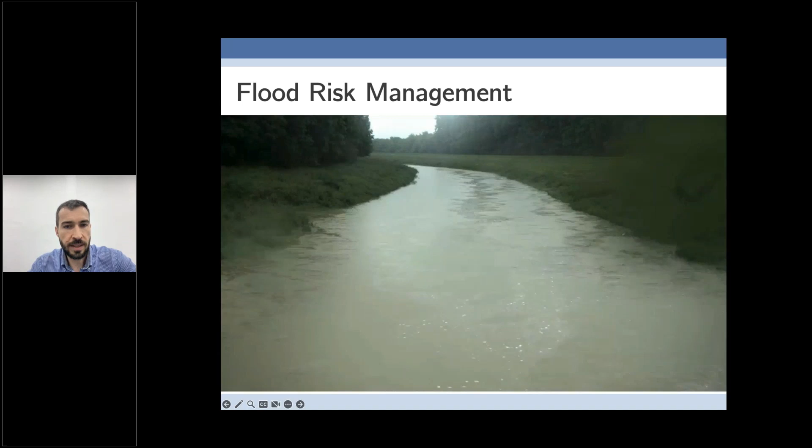In terms of flood risk management, we can talk about three things. The first one is detection. Detection is something we actually do when the flood has already started. Without any earlier preparation, detection is an immediate action that can be done during the flood to mitigate or minimize the damage caused by floods.

Then if we look a little bit more into the future, this is prediction or forecasting. We can forecast the weather, the rainfall, and use river or flow models to forecast the water level, and warn people in advance that a flood is coming. We can warn emergency services to prepare for potential flooding.

We can tell people to avoid unnecessary travel during the season when we expect heavy flooding, and tell them which areas will be flooded. We can evacuate people in areas where we expect really heavy flooding. So prediction is something we do to mitigate flood risk maybe a week in advance, or a few days in advance.

Finally, the third thing is planning. Planning is something we can do many years in advance to mitigate or minimize flood risk. I'll talk more about it later. Planning involves things like construction works and public education, but to do the planning properly, you need a lot of data to do it efficiently.

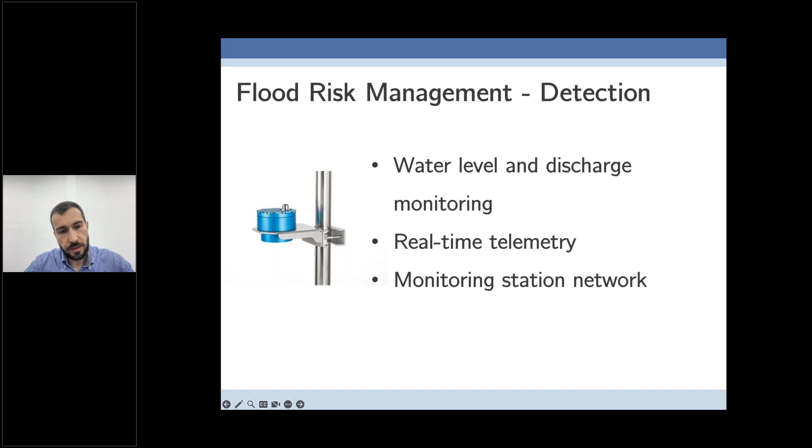So in Croatia it is crucial to have many water level and discharge monitoring sites on all these smaller tributaries, because depending on weather conditions, rainfall, or snow melt, sometimes the flood can start from one region of the country, sometimes from another region.

Sometimes you can have very heavy rainfall in a small area that creates a flood, but sometimes you can have steady rainfall, not of high intensity, but affecting the whole country. Then all these small tributaries have slightly increased water levels, but when they discharge into the biggest river, you can suddenly have flooding downstream.

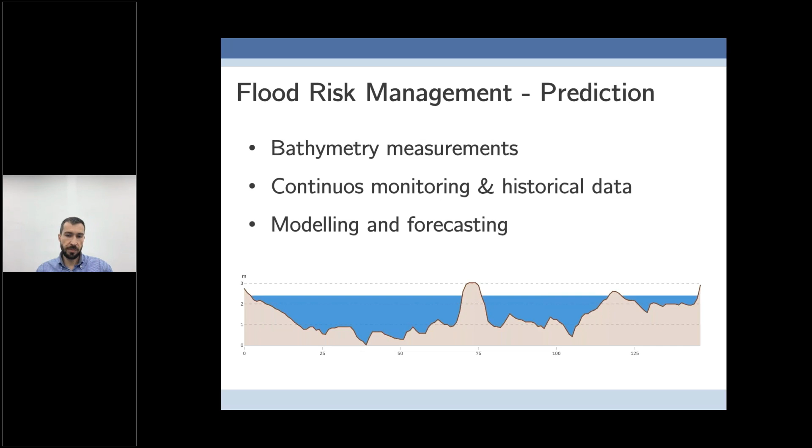The forecasting information sits between the prediction step and the planning step: having protocols for informing the public that a flood is coming. You need to plan these protocols in advance, how to share the data with all relevant parties, so that when you do the forecast, you already have these protocols in place.

From a planning perspective, the most costly measure is of course construction, but construction itself makes the biggest saving from flood damage. Education is not very expensive, and it also has a big effect, especially in changing how people behave and in saving lives during a flooding event, while construction work is targeted at saving both life and property. Education is more targeted at saving life.

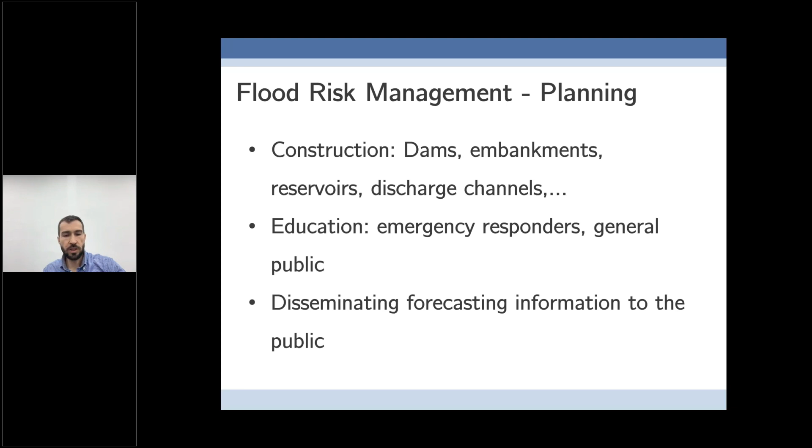Finally, people should be informed about an incoming flood in a timely manner. I have mentioned that for all three parts—detection, prediction, and planning—it is important to have accurate and real-time data about water level and discharge in rivers and channels.

For detection, you need data in real time to be able to warn the public. For prediction, you need data collected over many years so that your forecasting models are accurate. And for planning, you also need long-term hydrological data for water levels and floods, so you know where to build dams, how big a smart tunnel needs to be, and so on.

Coming from a company that manufactures this kind of instrument, I can share some of the technologies used over the past few years to deliver accurate and precise data. To get accurate measurement of water level and discharge, you need to be aware that this kind of instrumentation is installed out in the field.

These instruments, first of all, need to be reliable. They need to be able to operate under all kinds of atmospheric conditions—high or low temperatures, depending on the climate zone where they are installed, and when the weather is hot, humid, or dry—because you do not want this data only during rainfall, but also during the dry season, so that you can do prediction and forecasting accurately.

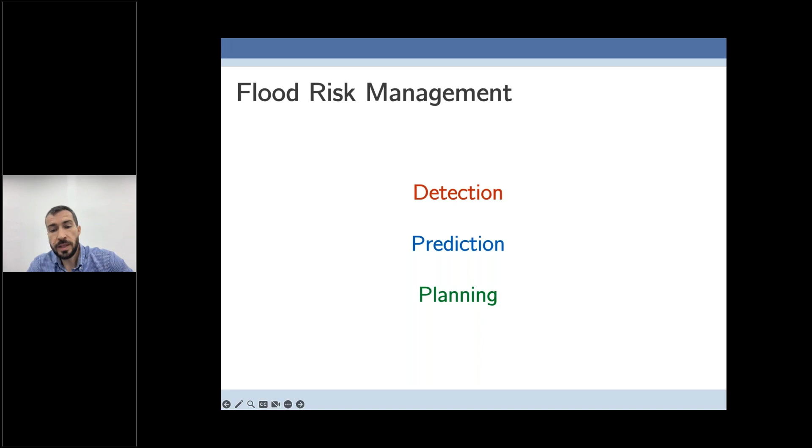We have seen over many countries where we work on this kind of projects. In some countries, they just measure the water level at many monitoring sites. To get the discharge of water, the flow in cubic meters per second, they do many calibrations where they use an instrument such as an ADCP or a hydrometric wing, like a propeller, to measure the velocities across the whole channel and then calculate the discharge of the river.

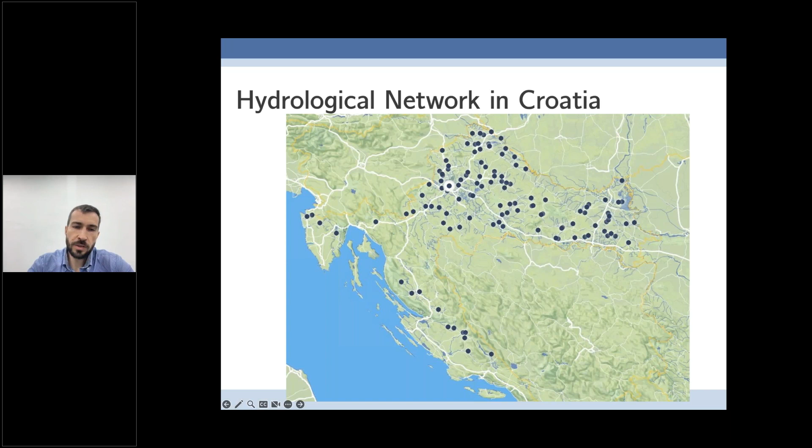Not many, but more and more countries over the last few years have also started to perform continuous discharge monitoring, so not only measuring the water level, but also water discharge. There are many different kinds of instruments that can be deployed in the field to perform discharge monitoring.

There are contact instruments such as a side-looking Doppler instrument. This is an ultrasonic instrument which is submerged into the water and uses the ultrasound principle to measure the velocity of the water flow.

There are also non-contact instruments such as radar-based sensors, which measure the velocity of the river flow from above the water surface. I would like to discuss this method a little more because it provides many benefits, such as ease of installation and low maintenance, which I have just mentioned before.

As an illustration, I will use the instrument manufactured by our company. You can see the picture of this instrument, and it actually consists of two different sensors, two different radar sensors.

The one you can see on the bottom part of the instrument, the blue circular one, is a radar-based water level sensor. It measures how long it takes for the radar waves to travel from the instrument to the water surface and then bounce back. The longer it takes, the further away the water is from the instrument, and using a simple calculation, the instrument can determine the water level.

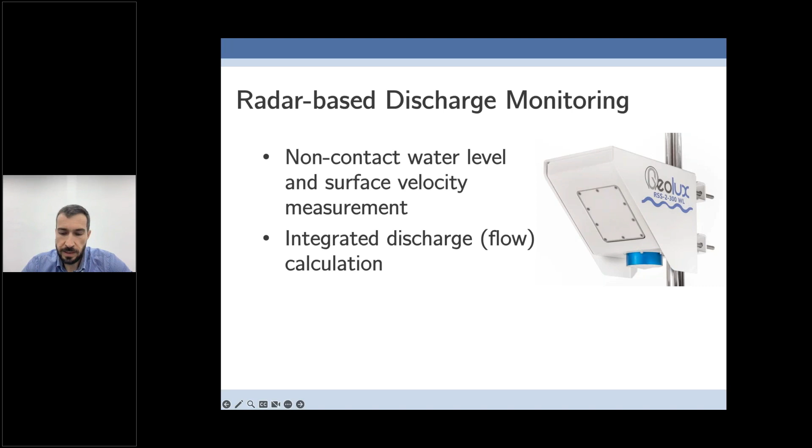Now, the question is, how is this instrument able to determine the complete discharge of the river if it measures just the water level and the surface velocity? This is something I am going to discuss now. But before we go into the discharge calculation method, I would like to outline once again the benefits of using non-contact technology.

So it can be done even during light rain or even heavy rain, although that may be unnecessarily dangerous in those cases. But you do not need to wait for low water conditions.

You do not need any special tools or cranes or things like that. If it is installed on an existing bridge, then the installation is really, really quick.

The maintenance for this is very low. When our customers ask what kind of regular maintenance is required, we recommend that you visit the site once per year and do a visual inspection of the equipment on site. There is no regular maintenance required for the instrumentation.

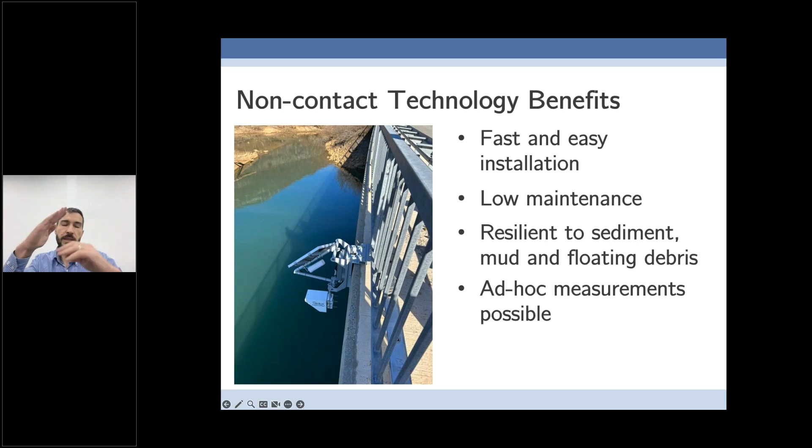For the radar instruments to work, the area between the sensor and the water surface must be clean of any other object, so that the radar beam, transmitted by the radar, can freely propagate to the water surface and be reflected back.

Sometimes if the channel is very narrow where the measurement is being made, it can happen that some vegetation grows or a tree branch grows in front of the radar, so in that case it has to be cut down to provide clear operation.

But since this vegetation grows slowly, it is not required that the visual inspection is done very often.

On some sites, maybe one out of a few thousand that we have installed, we would see, for example, hornets building their nest all around the instrument, blocking the operation of the radar. Or somewhere the cables were damaged by small animals like a mouse or squirrel, which would simply bite the cable so it could be damaged.

Of course, this is something that can happen to any other equipment installed in the field. But it is very important to note that hydrological equipment outside of the water requires much less maintenance than equipment installed inside the water, because there is no sediment flowing around your instrument, no mud.

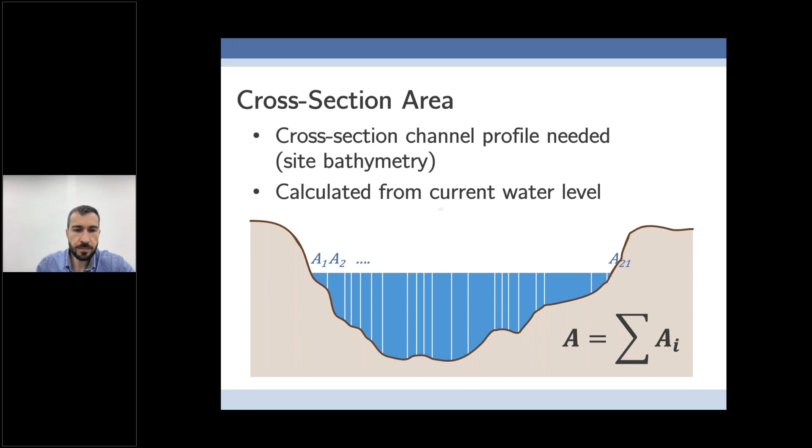The next step is how can we determine the average flow velocity across the profile if the radar measures only the flow velocity at the surface.

These velocities get slower and slower as you move closer towards the ground. And at the ground, because of the slowdown due to friction, the velocity drops suddenly to zero.

To get the average flow velocity across the channel based on surface velocity measurements, we introduce something called the K factor. This K factor is a simple ratio between the velocity measured at the surface by a radar instrument and the average velocity across the whole channel.

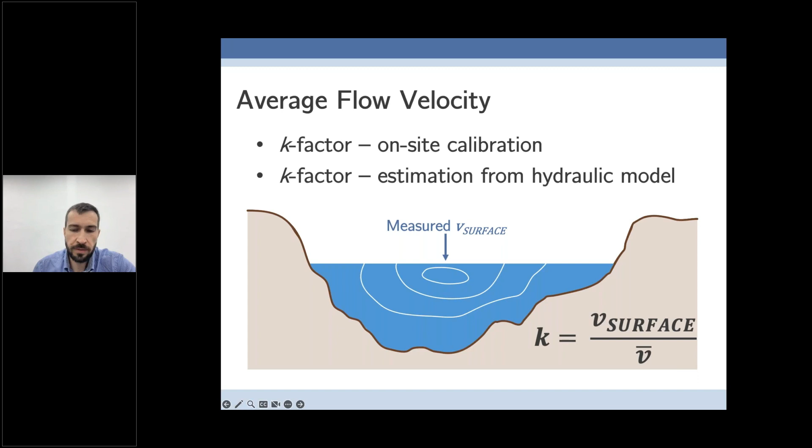As I've explained, the K factor will not change greatly for small changes in water level, but only when the water becomes very shallow or during flooding.

Now the question is, how can you calibrate the K factor? What does this calibration involve? For small rivers, typically flow meters such as hydrometric wings, a small propeller, or an electromagnetic sensor are used.

A person would walk across the channel, measuring flow velocity maybe every 1 meter or every few meters apart, and also at several different depths. By making these multiple flow velocity measurements across the channel profile, you can easily determine the average flow velocity.

Then you take the average flow velocity determined by manual measurements across the whole channel, and the radar measurement of the surface velocity, divide these two values, and you get the K factor, just like in this formula.

On bigger and wider rivers, it is impractical to do the calibration with flow meters. On very wide rivers, it would take a long time to cross the river, and the flow is sometimes so fast that it is not easy to put the flow instrument deep inside the river. In those cases, an ADCP instrument can be used.

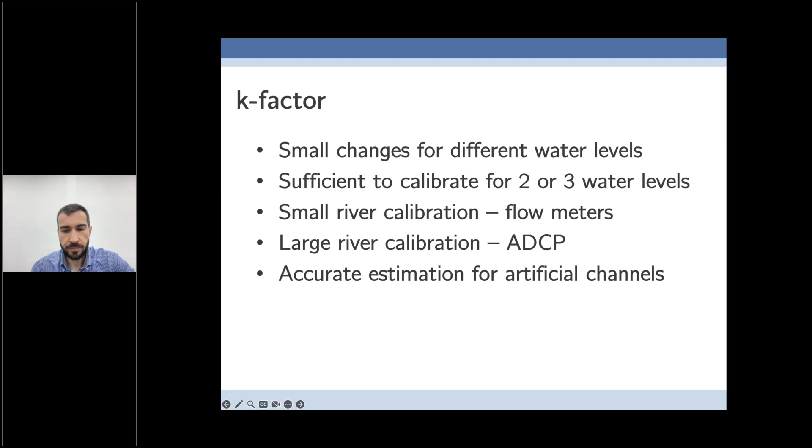The benefits of using surface velocity methods - there are several of these benefits. The first one is continuous discharge measurement. If you want to measure discharge at a certain point of a river, you can always go there with an ADCP, for example the ADCP boat. You can pull it across the river and you can get a measurement of the discharge.

However, that is not continuous measurement. You had to go to the site, perform the measurement from an ADCP, sometimes do some small post-processing or cleaning up of the data, and then you get the discharge measurement at one point in time. And it is expensive to do it again, so you do it just for the calibration typically.

The radar-based method for discharge measurement is continuous discharge measurement. It will provide continuous, real-time information about the discharge at a certain site. You can have this sent by telemetry data to your system. You can have many hundreds or thousands of monitoring sites across the country, and all this data will continuously be fed into your system to allow you to do real-time prognosis, warnings, or alerts, and so on.

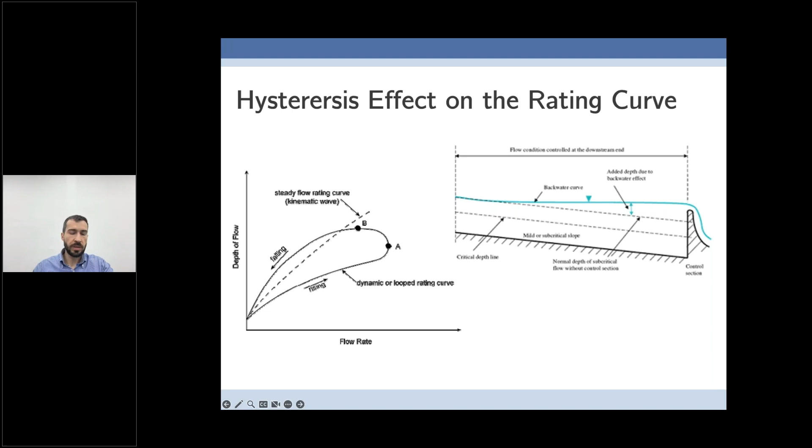The other benefit of using the surface velocity method can be seen on rivers that have reversing flow. Typically, there are two kinds of rivers where the flow direction can be reversed. The first are tidal rivers, those with confluence into the sea affected by tide effects. Every time there is a rising tide, the flow direction of the water can be reversed and some part of the water can flow inland. With the surface velocity radar, it is possible to determine the direction of flow.

If there is a farming area close to the sea negatively influenced by too much salt water, you can easily use the surface velocity radar to know when the fresh water is flowing out to the sea, but also when the seawater is coming inland. So to protect the crops and farmland, you can close the floodgates. Simply measuring the water level, you will never know if it's rising because river flow increased or because high tide is coming, unless you have many mareographic instruments to measure tide and compare against water level. So it is much simpler to have surface velocity measurement in place.

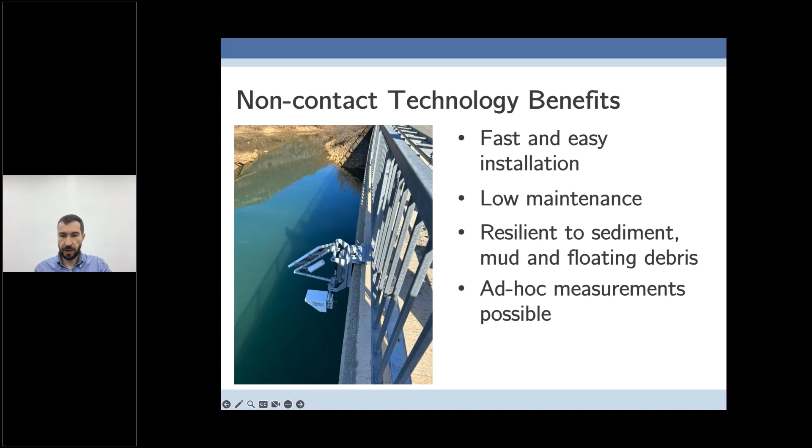And finally, by measuring the surface velocity and the water level, discharge can be calculated in a very accurate way. Of course, to get the accurate measurement needed to plan for flood protection, mitigate flood risk, and give accurate forecasting, it is critically important to have accurate information about the flow, discharge, and water level.

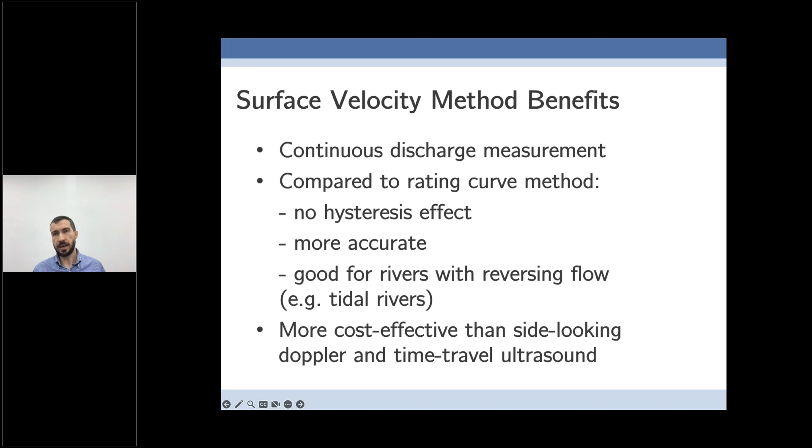I can also show you what we do on our side as a manufacturer of these instruments to provide the highest accuracy. So I will show a small video of how we calibrate and test our instruments when developed. I hope that this video will go through the presentation.

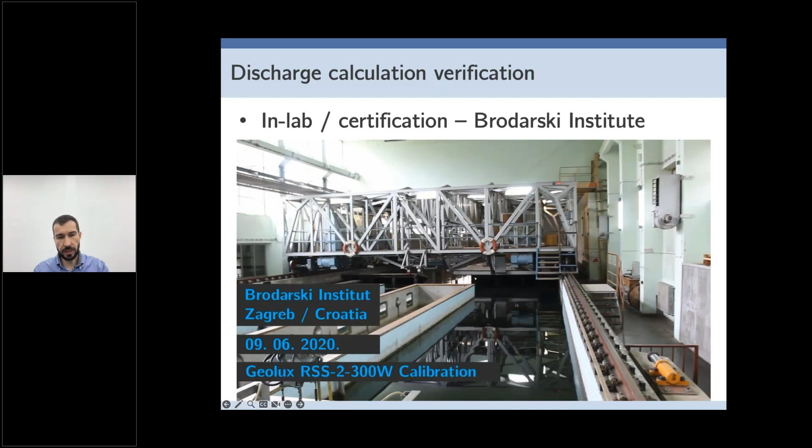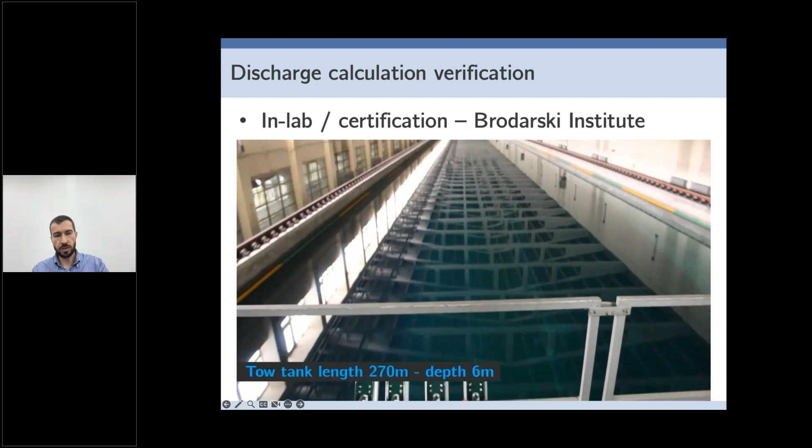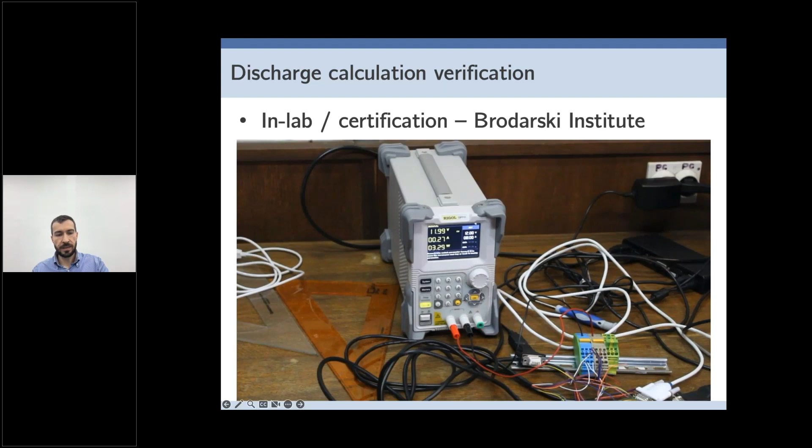So this is a huge tow tank, like a very long swimming pool, 270 meters long. It has a big platform on it that can be moved in a controlled way with controlled velocity above the water. We place our sensors, the surface velocity radars, above the water on this platform. The platform is moved in a controlled way with exact velocity, and then the measurements from the sensor can be calibrated.

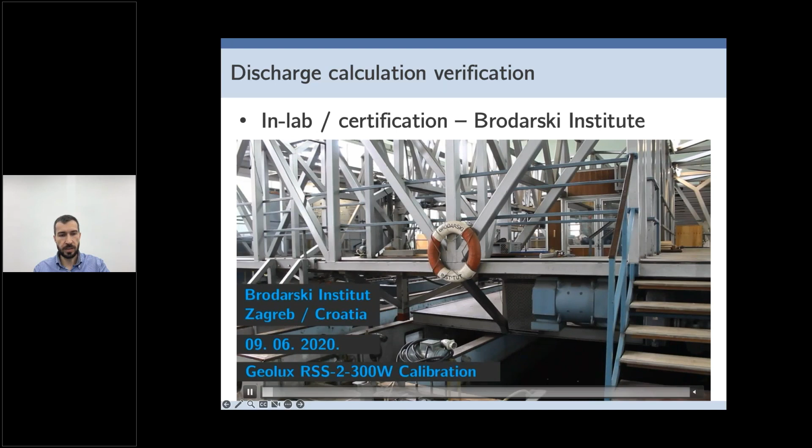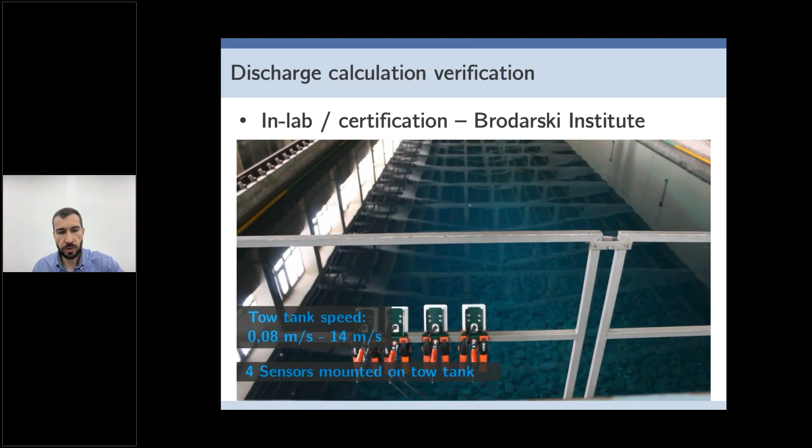Using this method, we ensure that the instruments to measure surface velocity produced by Geolux can operate within this tested range from 2 meters per second to 12 meters per second with accuracy of less than 1%. In a smaller tow tank based in Switzerland, which I don't have video for, we calibrated the sensors from 0 to 2 meters per second. So for the full operational range, the instruments have been tested in a controlled way in tow tanks: smaller velocities in Switzerland, and larger velocities in a big tow tank in Croatia. I'll let the video play to the end, and then we'll move to the next slide.

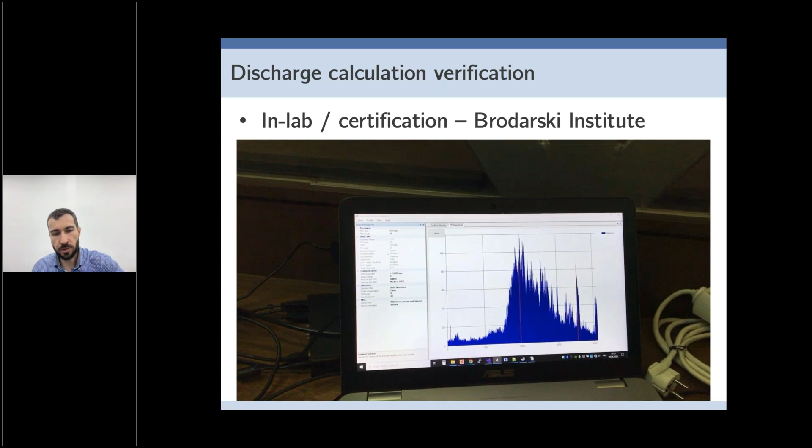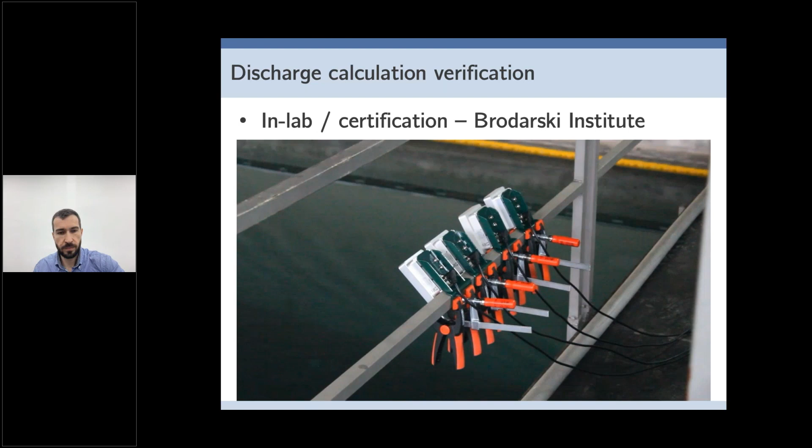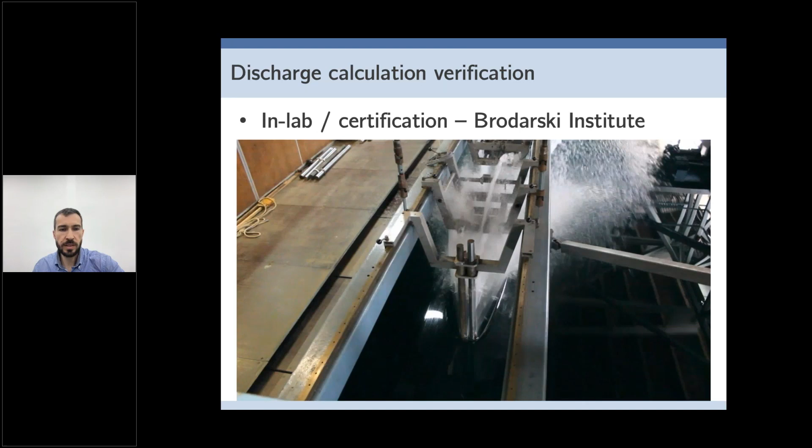So to make the conditions as realistic as possible, we also have this steel rod inserted into the water to create some disturbance on the water surface, to create the waves, as this is what can be expected with the river flow.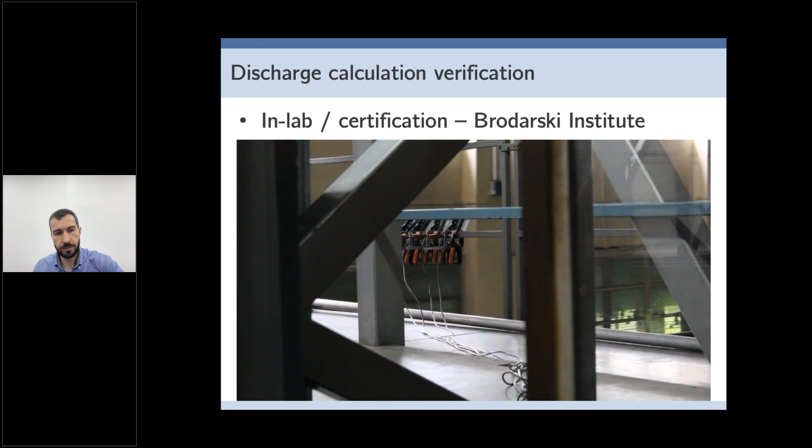And this is the equipment on the platform which makes it move and control the wave.

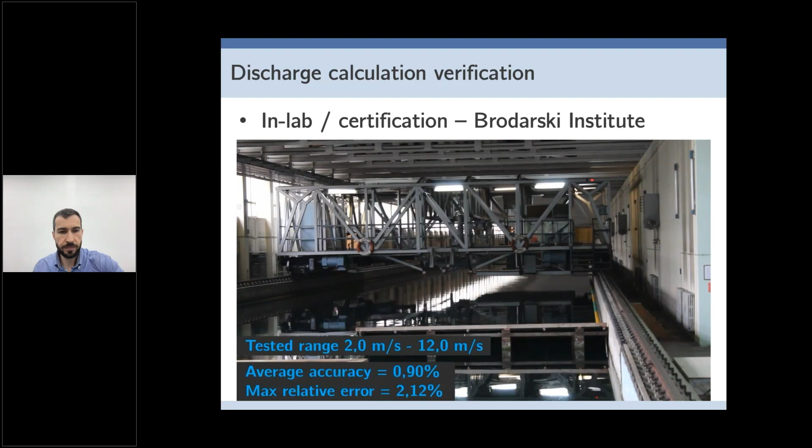So the title of this presentation is Flood Risk Management and Early Warning Systems. So far, I was talking mostly about flood risk management, what can be done to manage the flood risk, and how to collect the data which is essential for it. I have also highlighted one of the modern methods used to get the discharge data required for flood risk management.

The second part of the presentation is how to implement early warning systems. Early warning systems have basically two goals that need to be satisfied: the first is real-time flood detection, and the second is reliable alarming. So with the early warning system, you need to be able to know when the flood is happening, and you need to be able to raise an alarm and send this alarm to people.

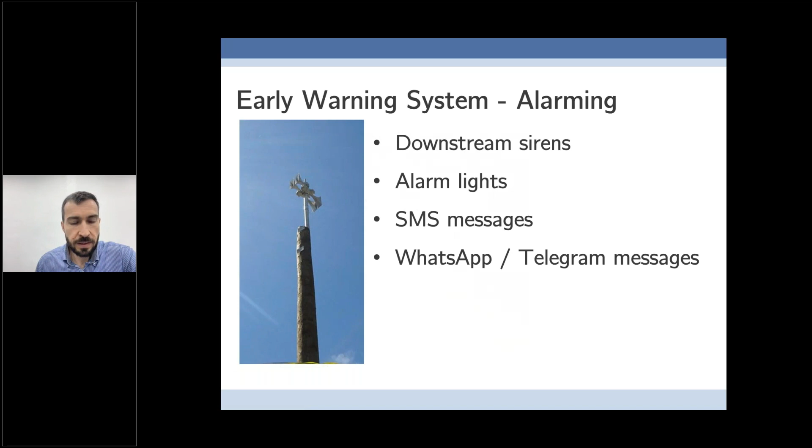As I said in this previous slide, real-time flood detection but also reliable alarming is critical. There are several considerations about data transfer that need to be satisfied in order to provide reliable alarming, and we have seen this in several of the projects where we participated.

You need to be aware that the GPRS network, while it is very versatile and typically widely available, can be unreliable. The first reason is simple: perhaps some area is not covered by the GPRS signal, and one village downstream might have houses not really covered. If you rely only on GPRS to send an alarm, it's possible it will not reach everybody.

But a bigger problem with GPRS is that it's a public network. It is not isolated, and it is used by all people within an area. During a flood event, as we've seen in many countries including our own in Croatia, when flooding happens people start calling emergency services, police, the fire department, or whoever is in charge of evacuation. People start calling family members to ask if they are well, if they need help, or to ask for help themselves.

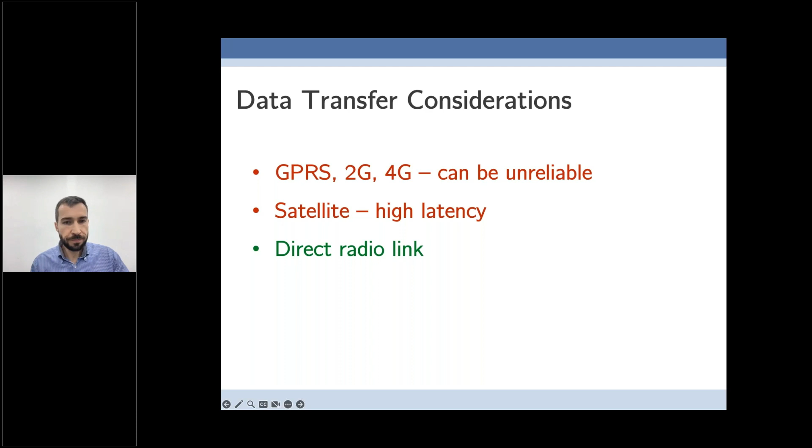But also to provide wider distribution of warnings, we use the GPRS link, which in most cases is available. However, the alarms sent to mobile phones can sometimes come a little late or be delayed. But the important part is that all areas that can be flooded have local sirens or local alarm lights which use reliable direct radio link communication to the water level monitoring station.

Finally, it is also important that the equipment health of all these sites is continuously monitored. If they're operated by a solar panel, then the battery status and solar panel health should be transmitted periodically to the central data storage system, so that if there is any problem with equipment, it can be detected early by maintenance personnel, giving them enough time to go on site and resolve the problem, maybe replace the battery or clean the solar panel if it's dirty.

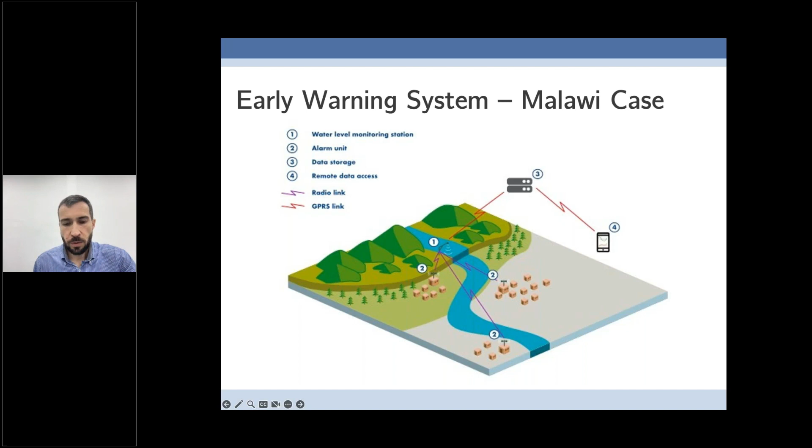Now moving forward to the end of my presentation before the Q&A part, I would just like to share several pictures of various kinds of installations of the monitoring equipment, which are used either for early warning systems or for planning of various flood risk mitigation projects.

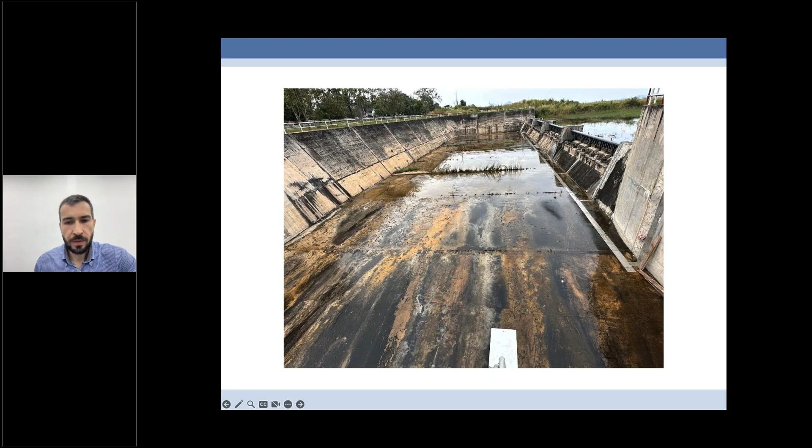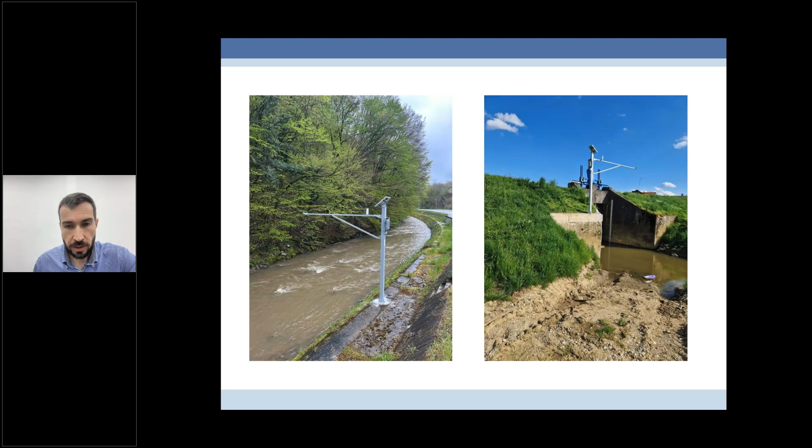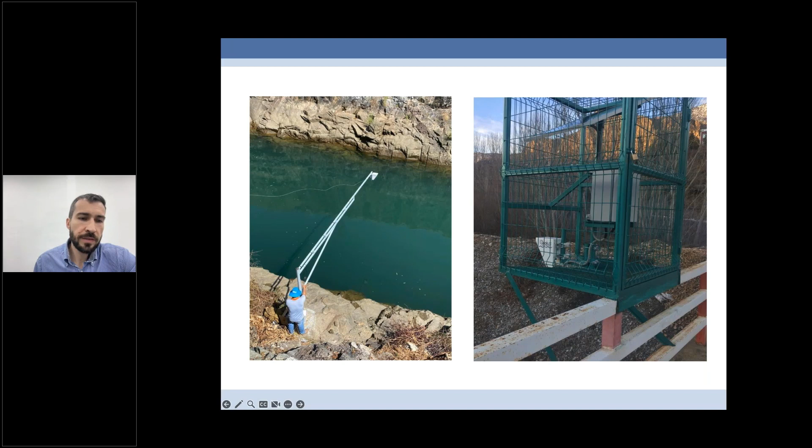On the left image, the arm, the cantilever, is approximately 5 meters long. It can also be longer, like in this picture, where it is approximately 10 to 11 meters long, if it is required that the cantilever extends more towards the water surface. To prevent vibration of the instruments, there are many tension wires, support wires that keep the cantilever arm safe from any vibrations.

When installing radar-based instruments above the water surface, it is important to prevent any kind of vibrations. The vibrations themselves will not disrupt the water level measurement so much, because the water level sensor makes multiple measurements and calculates the average value, so it averages out all these vibrations. However, the surface velocity sensor is affected by vibrations. So for this reason, when a longer cantilever arm is used, it is important to make it stay in place.

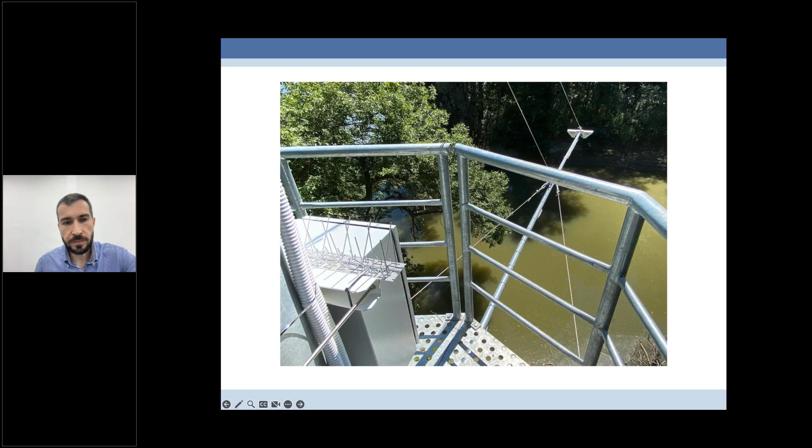On this picture, you can also see some other installation on top of the bridge, where it's very easy to install because the bridge structure is in place. And again, the site is small, it's compact, easy to install, and continuous measurements are provided.

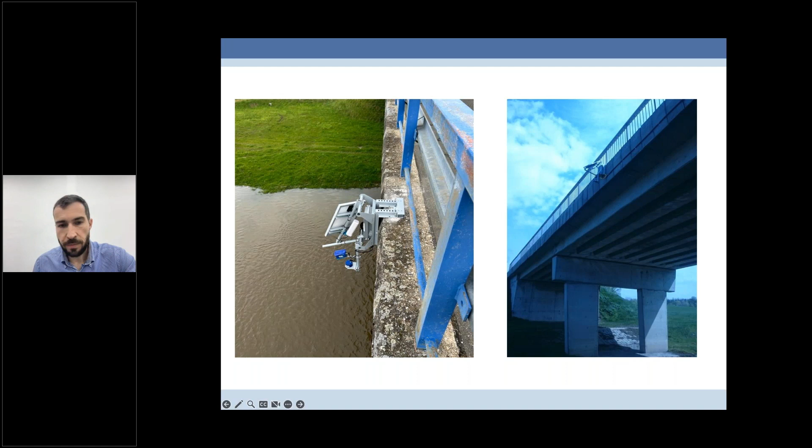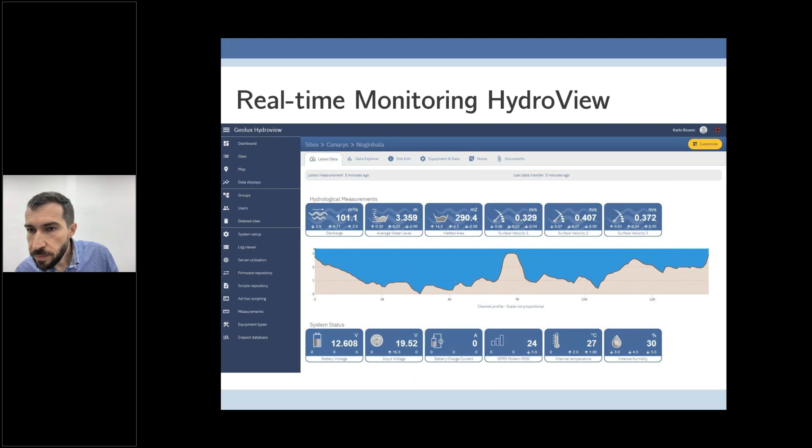Just a moment. I will now share a different screen, sorry. Just wait a brief moment. Just a few more seconds.

So here you can see what the initial login screen looks like. There is a list of many sites that receive the data, water level and discharge, and some sites even receive water temperature data. Since this is an ongoing project, so far approximately 130 sites have been installed.

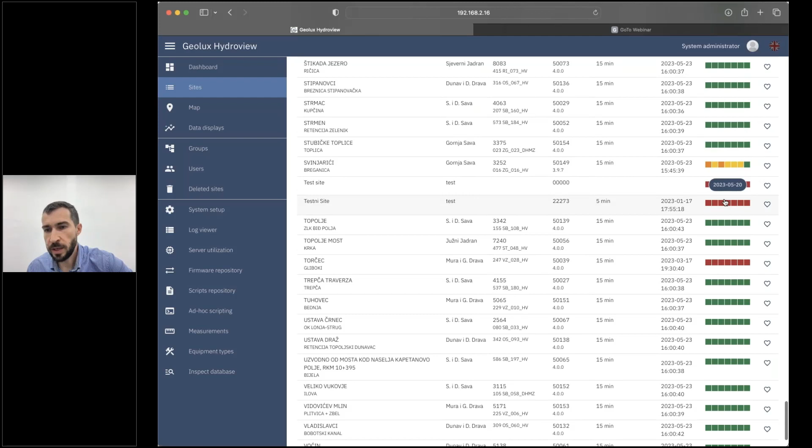Some sites are currently undergoing installation, so for them you would see red indicators that the data is not being sent to the system. On the right side with these indicators, you can see the health status of the data being transmitted. If this is green, it means all the data for a certain day was sent. There are seven squares, each indicating health for one day in the past week. The ones which are red do not transmit anything. The ones which are yellow transmit some data, but not all, due to very weak GPRS signal on site.

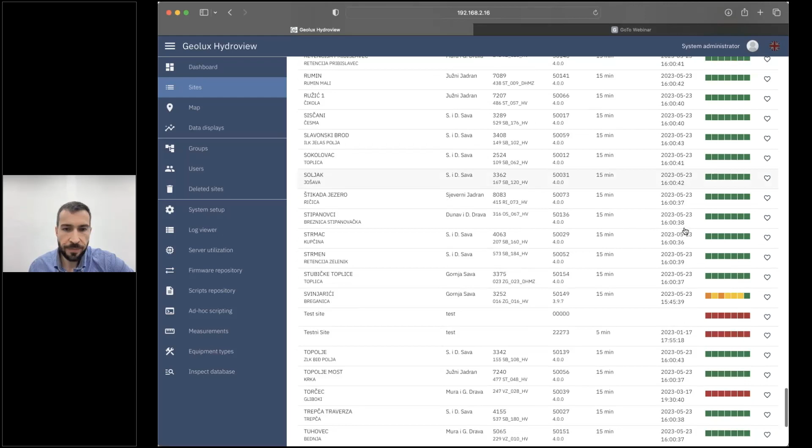Now we can click on a certain site to actually see measurements. This site, which I have just randomly selected, has a camera on site as well, which gives us snapshots maybe every hour or every 2 hours. So we can slightly scroll back and see what the flow conditions were at a certain point in time.

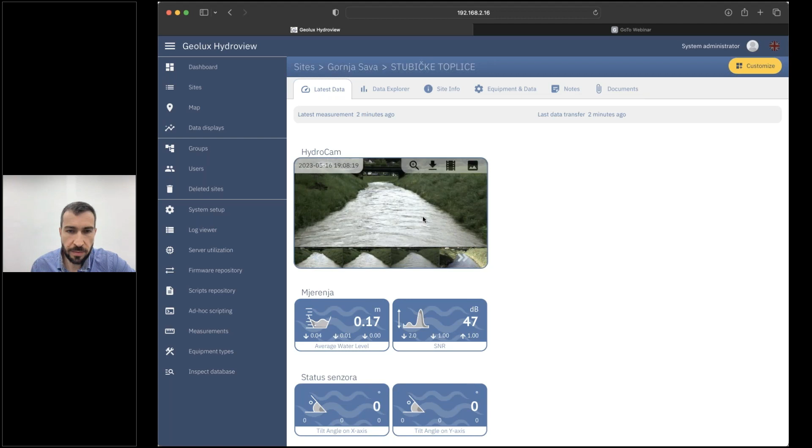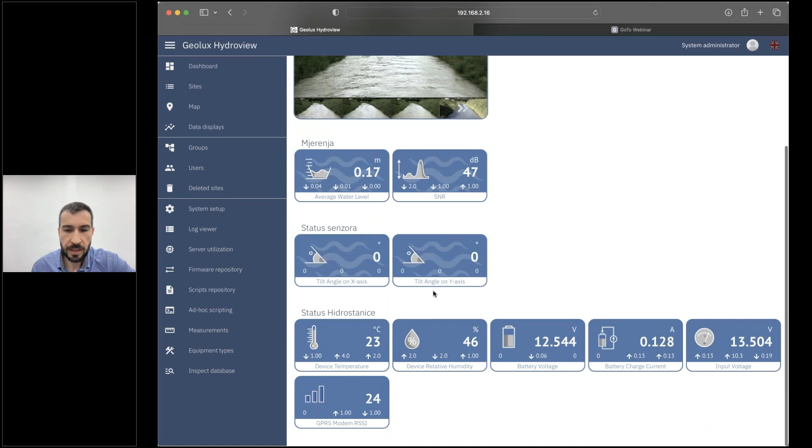I will also zoom in on the picture just to see what this river looks like. It is a small river, but this one can also flood a lot. You can see here the current measurements of the water level and diagnostic information like the tilt angle of the sensors, to make sure they have not been bent and are looking perpendicular to the water surface, and some battery status and the strength of the signal and so on.

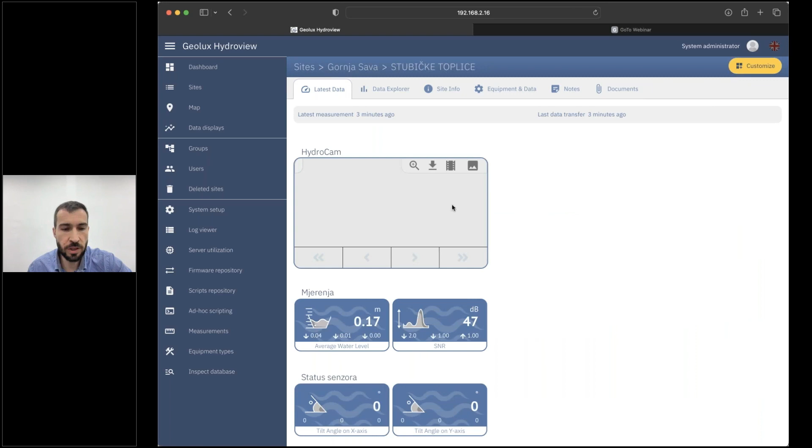And then historical data can also be explored. So here you can easily see the flow, the water level graph on this site. You can see that on the 17th of May, there was some increase of the water level over 1 meter. So we can even try to get a picture for that by going back and trying to find the picture from the 17th of May.

So perhaps this picture you can easily see. If we go and select the picture from the date when we saw that the water level increased, then we can see that the water level is high compared to some of the pictures I showed you before, or from the latest picture, in fact, which was taken right now.

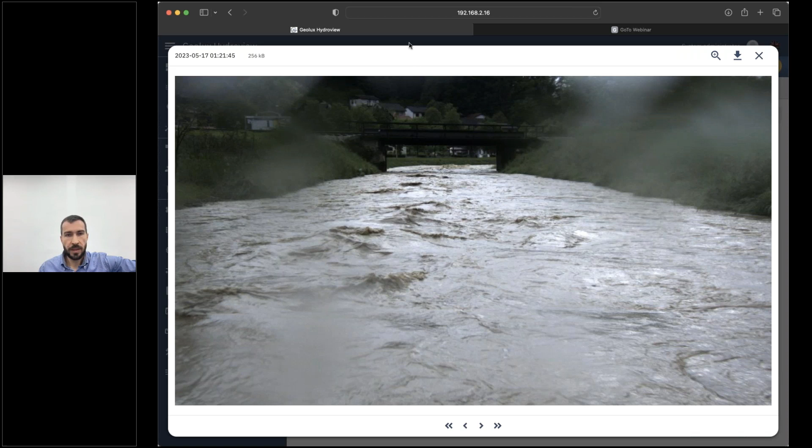This site which I have now selected does not measure the discharge, just the water level, but if there was a discharge measurement instrument, there would be another graph with the measured discharge. There is also the ability to configure various alarms. An important feature is that the scanning interval, the measurement interval, may be every 15 minutes, but if the water level passes a certain threshold, it automatically changes to 5 minutes or even 2 minutes, so that during the flood we get more accurate data with higher resolution.

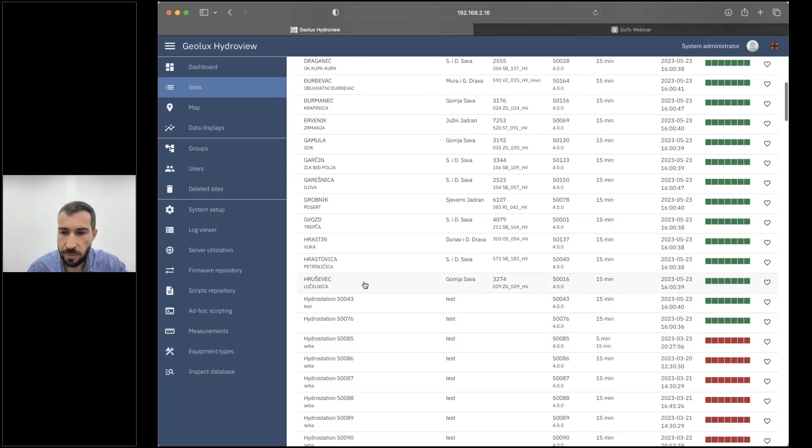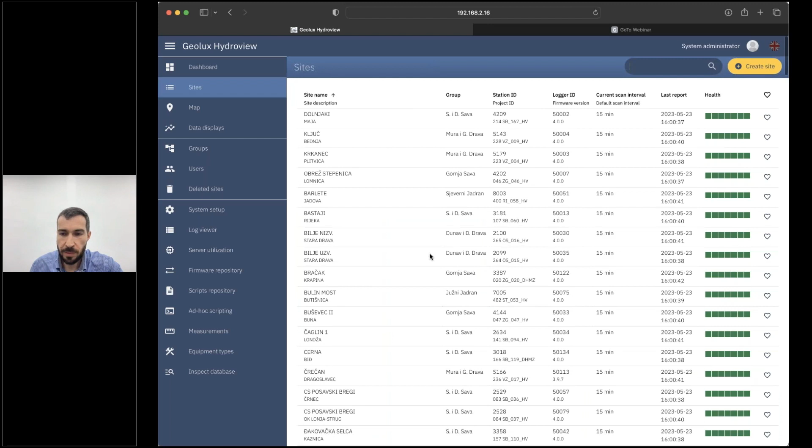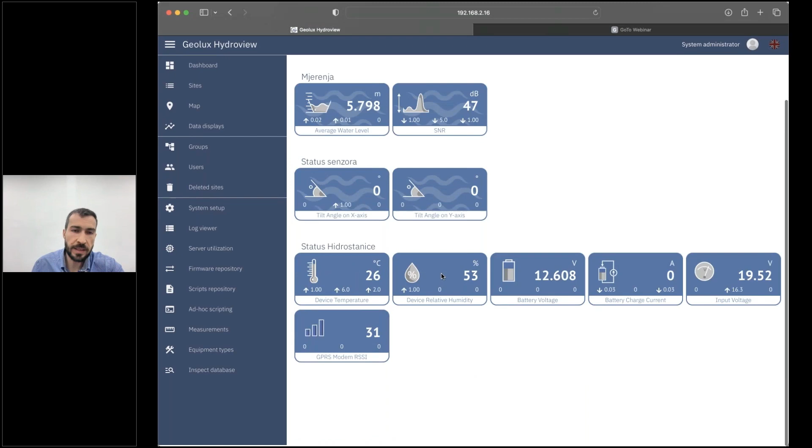So let's pick some other sites at random, maybe some of these lower ones, so we can also see what the conditions are for some of these other sites, and maybe a third one as well, just as an example. You can see that in this system it is very easy to integrate a really big number of sites that send data, and the system automatically measures all this information. The system is able to raise an alarm, send SMS messages, send other messages to the smartphone, and so on. Again, here are the latest measurements, and we can also see flow graphs for different conditions, etc.

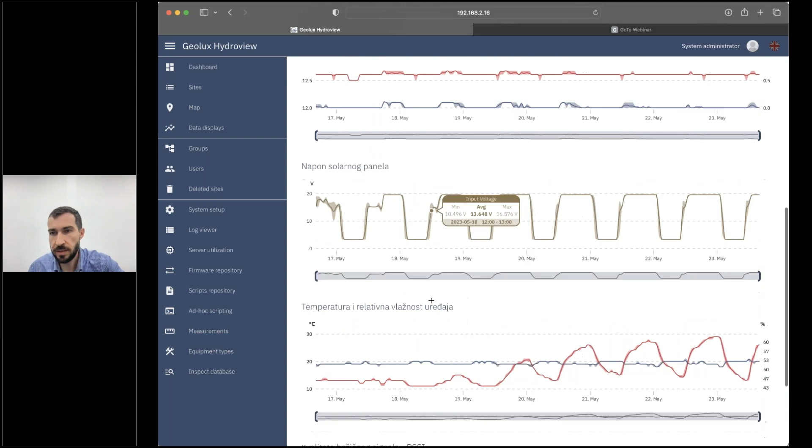So far, with this we have completed the presentation, and I would be very happy to answer any questions that you might have.